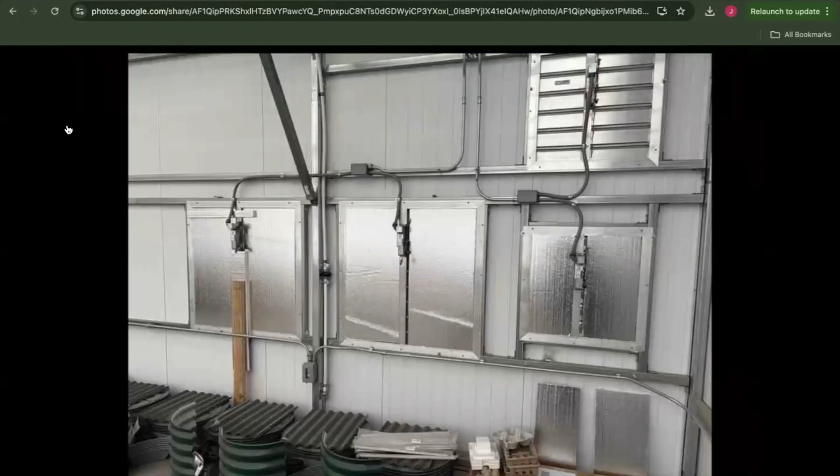And so it is November. It is mid to late November right now. And this is what some of our clients are doing right now. So in the summer, these are intake louvers, which are normally on the west side of the greenhouse. And in the summer, we need them all because it's full airflow. It's a vented greenhouse and we need everything. In the winter, we don't need all that. We'll never go full exhaust because it's cold outside, and that would freeze the greenhouse or make it too cold. But we do need some.

This greenhouse is in Denver, Colorado. It's sunny. It can get quite hot in the greenhouse in the middle of the winter. And so what you'll see here is 3 of these intake louvers are very well insulated. It looks amazing. But one is not. That upper one is still not insulated. It's also on its own circuit, so it can be controlled by itself. So the 3 that are insulated are basically off for the winter. They're not opening and closing behind the insulation. They're just off. And we've switched modes so that we're just intaking lower CFM. So we use a smaller fan when we exhaust, and we only need the single intake louver to allow in the appropriate amount of air without creating a pressure situation that would negatively affect the exhaust fan.

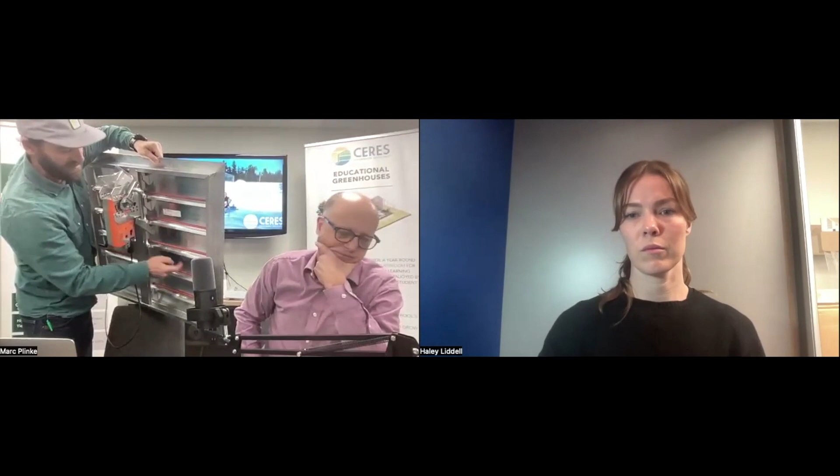So this is an upgraded louver that we're using more and more. When I tilt this forward, they don't open. And when we look on the back, we have a Belimo motor, which is a pretty robust motor, but we also have insulation at every spot where the fins open. So when this is closed, it's really closed. And we found that this makes a really huge difference in winter operation of the greenhouses.

And if we want to be even more prepared for the winter, you can have each one of these louvers by themselves being insulated. So they are actually having foam in between the aluminum pieces, which make them even better. So there are many solutions to this problem, which is one of the biggest: how to keep the cold air from coming in the winter months. That's the biggest thing that you need to look out for.

Great. Thank you for that prop demonstration. That was fun. It's good to stand up every once in a while.

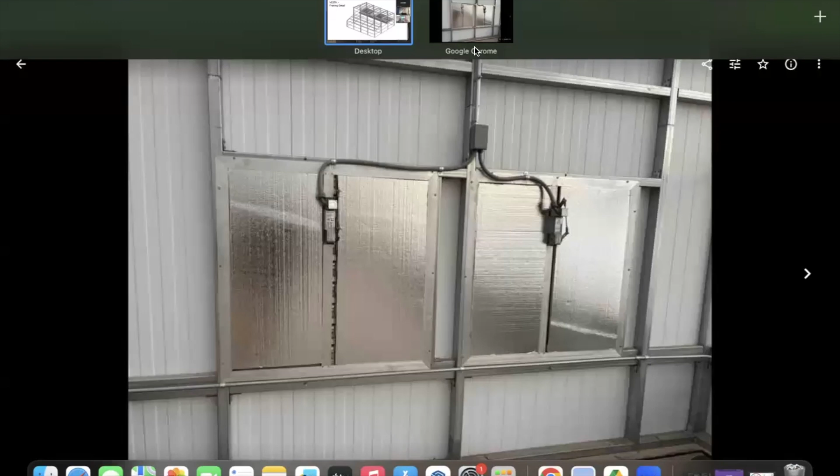We're going to get into a pretty important topic when it comes to greenhouse winterization, and that's heating. First question is, what is the most efficient way to heat a Ceres or non-Ceres greenhouse during the winter months? My favorite topic. I'll start with it. So heating, most people have some kind of a gas heater, which is the most standard thing to do. It can be propane, it could be natural gas. That's the standard for many commercial greenhouses. And those are obviously not climate neutral.

And so what other ways are there to heat the greenhouse? There are many, and we can talk about some of those today. The easiest one that we already talked about is the GAHT system. Yeah, I think before we dive into GAHT, it's important to say, if you're on a natural gas line at your property or business, it's a very cheap and relatively easy way, and they burn pretty efficiently, to heat a greenhouse. It's standard. So monthly expense wise, for active heating, it's your cheapest bet. Now, there's other implications, but that's baseline.

For all of our clients who don't have natural gas, we can basically use the same heaters, but with propane. It's a slight conversion. Still fairly efficient, but now you're paying a lot more per BTU, because propane is more expensive than natural gas. So operationally, it's the same. Your operational expenses are slightly higher. But we often get into how do we do this without using those standard heating technologies, which is what we're going to dive into here.

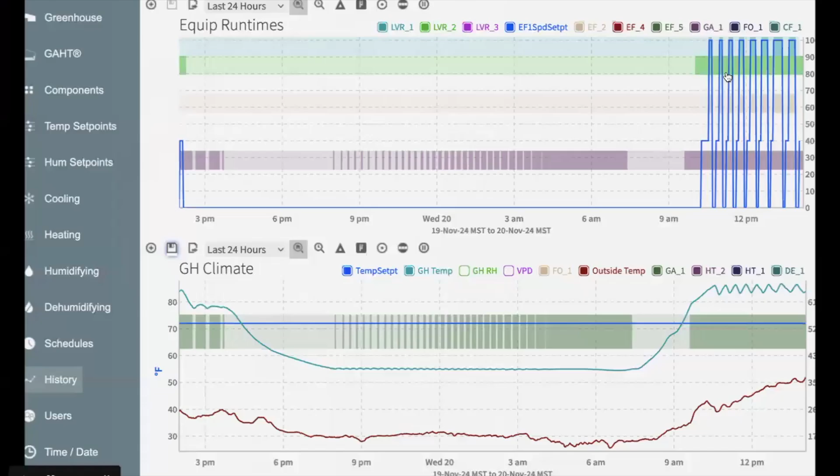But the GAHT system has the wonderful thing that it will take the warm air that you're getting in the winter months from the top of the greenhouse, put it down into the soil, heat the soil in the daytime, and therefore cool the greenhouse. Which basically says I have excess energy in the greenhouse in the daytime. Instead of venting it out because the temperatures get too high, we just pump it in the soil and heat the soil, which makes the plants happy. So that's a great way to go about that. And then in the nighttime, you take the cool air.

Well, you can show the next one if it really wants to come. Well, it went to slideshow and now it's trying to just roll through it.

Okay. So here you can see a greenhouse that is also here in Denver. You can see that the GAHT system can keep the temperatures at about 55 degrees without any heating. The outside was below 30. We went down to 24 degrees that night. And the GAHT system alone kept the greenhouse at a lovely 55 degrees, because it's a tomato greenhouse, so he doesn't want to get close to 50.

So he has heaters that he could run, but the client is very interested in being as climate neutral as possible. So he just runs the GAHT system. The GAHT system keeps the greenhouse at 55 degrees in the nighttime. And then in the daytime, because he has a lot of warm plants, he is okay with about 85 degrees.

So the greenhouse stays really within 2-3 degrees of around 80 to 85. And that's the time when the GAHT system is definitely heating again for the next night. And so we have had many cold nights in a row now, but also sunny days. And in all of those days, the general rule is, if it's sunny, the sun that you are having in the daytime provides enough energy to heat you all the way through the night. And that's a really, really cool way. All you need is the electricity for the fans.

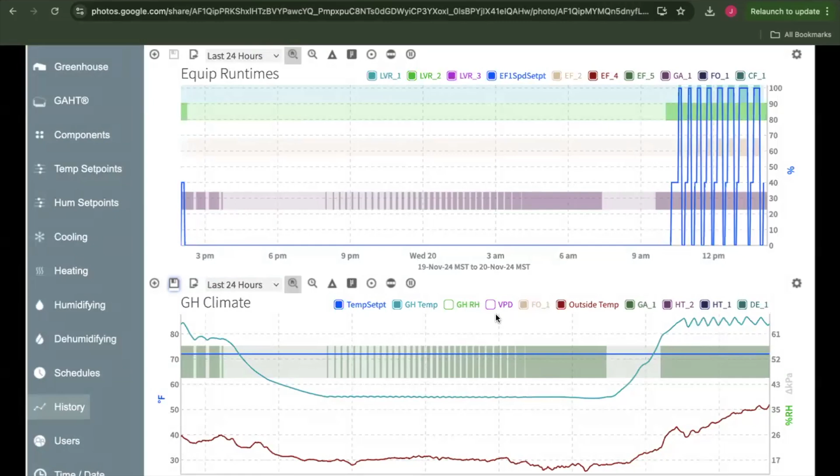Yep. But being a solar nerd, I love the idea of being able to heat the greenhouse with solar thermal, meaning you have solar panels that don't make PV electricity as much, even though these power panels are a new thing that are just here. So they basically make electricity and hot water at the same time.

And so one of the greenhouses that you saw before with the bananas, they actually have 4 solar thermal panels, meaning hot water panels, on the roof that heat a small tank. And from the small tank, the water goes into the soil, heating the soil. And so they can grow those bananas on just 4 panels on a 30 by 100 greenhouse. And it is amazing. And it takes very, very little energy. So if you don't want to use any or almost no electricity, a solar thermal panel is just fabulous.

So let's just back up a second. Water holds heat better than air. Yep. Pumping water is a very efficient way to move things like heat or coolness, as opposed to a fan that blows air. Yeah. And so if you're designing a low energy heat system, water is actually ideal. Yeah, better than air. But the upfront costs are usually more expensive because we're now talking about piping and some other things. And you have some more opportunities for failure with leakage and other things like that.

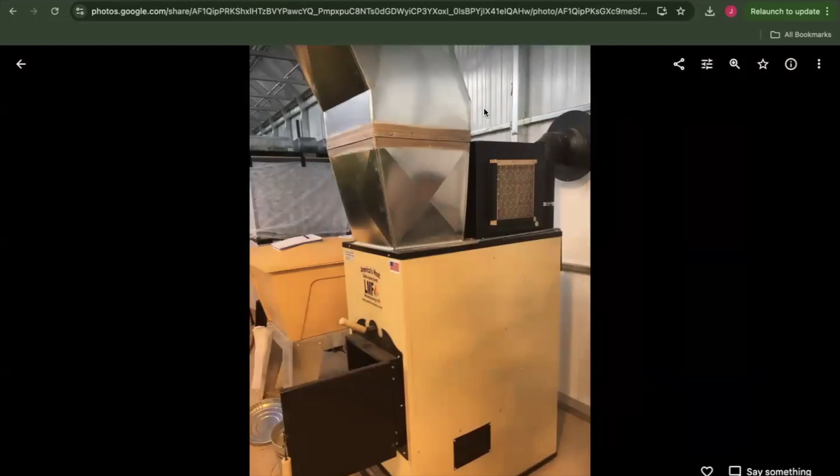The GAHT system is 2 fans and some PVC, ABS, HDPE. Marc's a chemical engineer. HDPE piping, and it's perforated underground. So it's already got holes in it when you buy it. And so the only thing that can really fail in a GAHT system's climate battery is the fan. And the fan is 4 feet off the ground, right in your face, easy to deal with if you had to. Yeah, and we use really good fans. Those don't seem to fail. Over decades, we have not seen them fail. So that's a really cool thing.

A few other alternatives for heat, because we get this all the time. Nuclear power plant. No, just kidding.

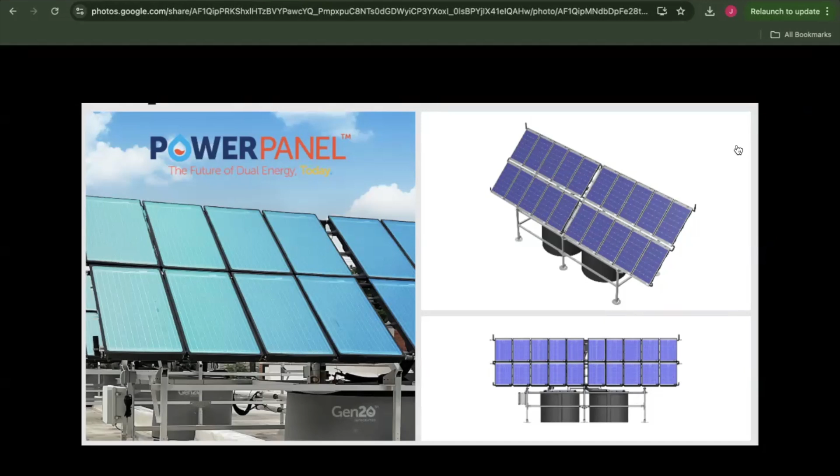Whatever is commonly available locally to your location can be a resource. We have a lot of forests in the mountains, so you can burn a wood stove in the greenhouse, but that is a lot of effort. And a wood stove doesn't burn all night unless you're feeding it, so you might actively be very involved in your greenhouse at that point.

Haley, are we talking too much? No, you're talking just the right amount. Are you ready for the next question?

Sure. So similar vein, but someone was wanting to know specifically about fuel costs. And I'm wondering if you have a few cost examples of heating. I didn't, because this is the kind of math that I don't do, but we have people at Ceres who do this kind of math. I asked Hervé, who's one of our engineers, about a 3,000 square foot greenhouse, which is a fairly standard size greenhouse for us, 30 foot by 100 foot.

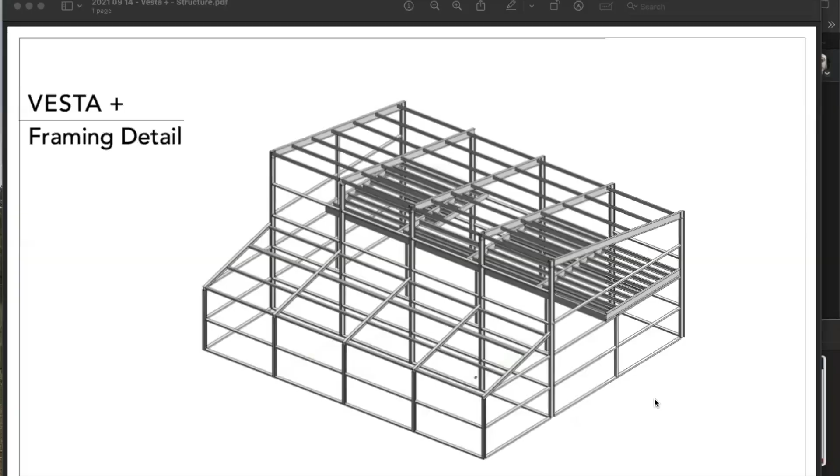Excellent answer. I'm going to move on to insulation just to make sure we get to answer questions from each section. Yeah. Is there a heat reflecting curtain to help maintain heat? Haley, if you don't mind, I think what I'd like to do is just quickly zip through the humidification and dehumidification really fast, just so we can be done with that. But I think it's worth everyone seeing. In the winter, this is a winter conversation.

A wet wall, which is also used for cooling, cannot really be used in the middle of the winter. Right. A fogging system can. And so the beautiful thing about fogging systems is they can keep your plants in the happy zone, which in most places is somewhere between 50 and 70% RH. And so with the relative humidity in that range, plants are really happy, especially younger plants. So the only way to do that consistently is really using a fogging system.

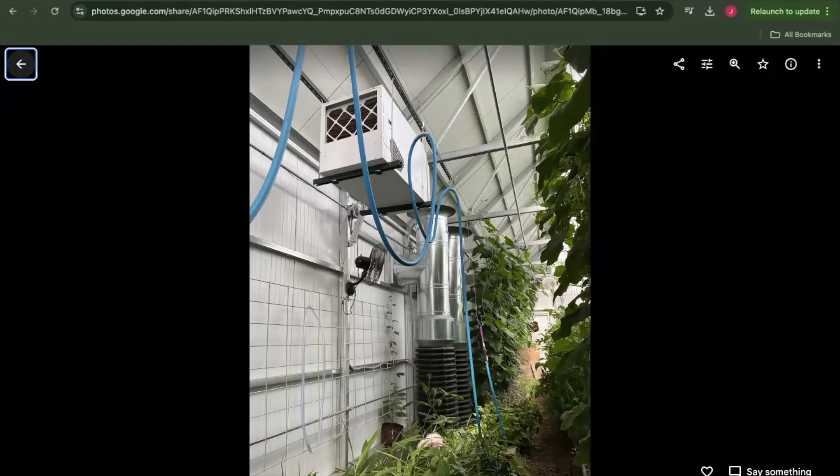And the flip side of that, again, we could probably do a whole webinar on this, but the flip side of that is the minute it cools down at night in the winter, the air is going to shed water. It can't hold as much moisture. Right. And so now you have to get rid of that. So we try and find a balance between using that fogging system as little as possible, but to maintain healthy plants and keep plants in a healthy vapor pressure deficit. But then you got to pull water out at night.

Yeah. And there's several ways to do that. This is just a dehumidifier that's on the north wall. That's the same GAHT system, dehumidifier. This uses power. A byproduct is heat, so it's actually a heater. It helps to heat in the winter, not necessarily intentionally, but it does. The other strategy we're doing right now is small vent fans. It's dry outside everywhere, mostly in the winter when it's cold enough. And we'll just move a little bit of air out of the greenhouse, which means we pull in a little bit of dry air from outside the greenhouse.

And that's a more efficient way, but now we have to heat more. Right. Now you need to heat more. But it's often a lower cost way to just exhaust a teeny bit of air, constantly have a little bit of dry air coming through the greenhouse. Yeah. Okay. And it works really well. I mean, both of them work very well. Both of them take a little bit of energy, but controlling humidity is an absolute must because plants are not happy when they're too dry or too wet.

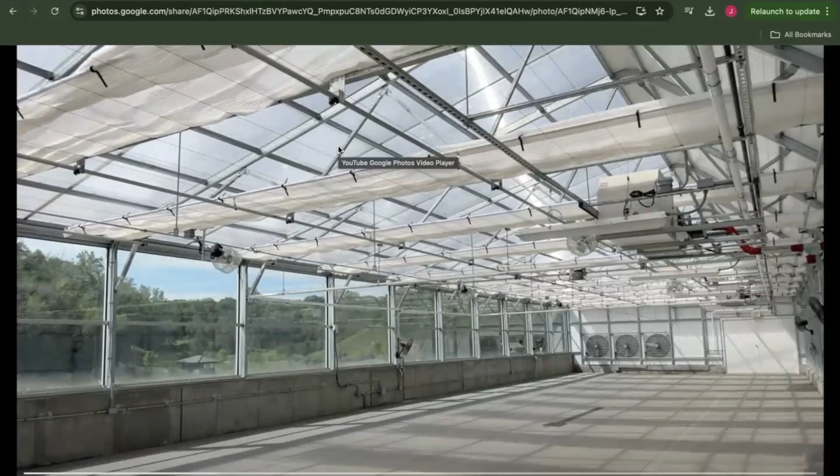Okay. So now this is the fun stuff. Marc's going to talk for an hour. Oh, no. Yeah. But really quick, we have 10 minutes, just a time alert.

This is what we would traditionally call a shade curtain, but it's actually an energy curtain, just the same. You can install these like you're seeing here, automated, where our controller will open it or close it depending on certain conditions. Or some people just have fixed shade cloths that they put either on the outside of the greenhouse or hang on the inside of the greenhouse all summer.

This is a very effective tool for us. It is basically, I don't want to say no power, but very low power. It's only using power when it opens and closes, and then it's sitting dormant for hours while it's shading or not. Right. So in the summer, this cools, but because this is a winter thing, they say, and I'm not sure how the math happens, but it's 47% heat retention.

Well, there are shade cloths, depending on what you want. There are shade cloths that can go to 75 and 80% reduction of heating needs. Right. This is dual purpose. So this is shade. We use the same fabric summer and winter. So it does both. So it's not amazing at either.

But something as simple as this, the glazing is the spot where you lose the most heat in the building. Our whole greenhouse is insulated except the glazing. This is like a little bit of a blanket at night. And you can do a double blanket if you want, but this reduces temperature swings in the greenhouse. So there's plant health to think about. There's operational costs to think about. It can significantly reduce your heating costs.